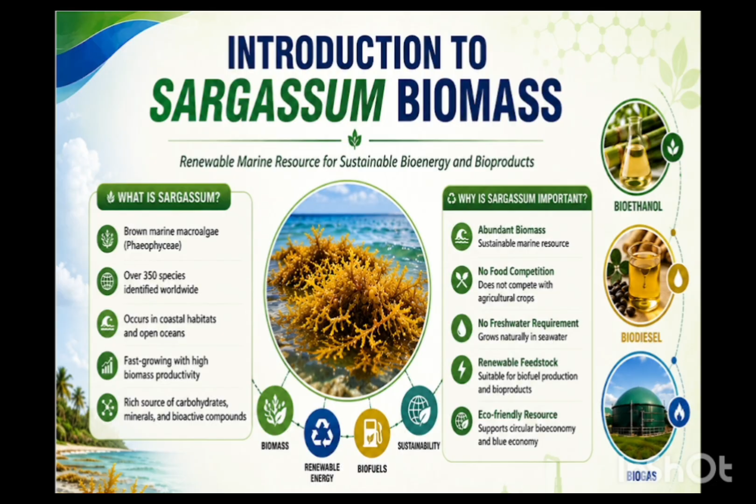It is suitable for biofuel production and bioproducts. It is an eco-friendly resource that supports the circular bioeconomy and the blue economy. So sargassum has both types of importance, as an eco-friendly and a renewable source.

Global distribution and availability of sargassum. Sargassum is basically found in the Pacific Ocean, Sargasso Sea, Indian Ocean, and the Great Atlantic Sargassum Belt, called GASB. It is found all over the world where there are coastlines, widely distributed in tropical and subtropical oceans. It is common in coastal waters, coral reefs, and pelagic environments, and exists in both attached and free floating forms. They form extensive floating mats across the ocean currents.

Availability: annual blooms generate millions of tons of biomass. Massive accumulations are reported in the Caribbean Sea, Gulf of Mexico, West African coast and Central Atlantic Ocean. The Great Atlantic Sargassum Belt is the largest floating bloom system, extending from West Africa to the Caribbean, thousands of kilometers in length. It provides a continuous and abundant feedstock for bioenergy and biorefinery.

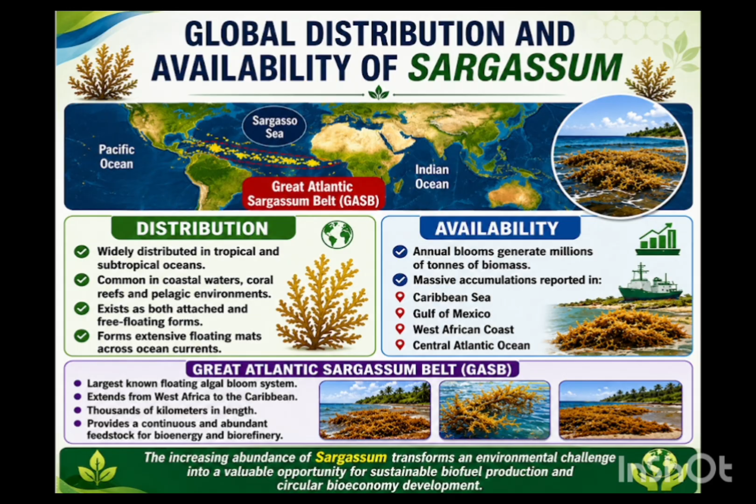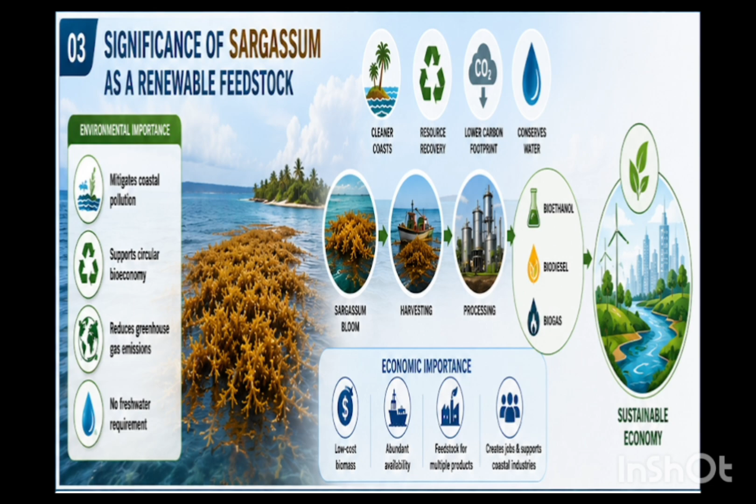So it is distributed all over the world, and its biomass production is higher compared to other feedstocks. What is the significance of using sargassum as a renewable source? First, environmental importance: it mitigates coastal pollution, supports the circular bioeconomy, reduces greenhouse gas emissions, and needs no fresh water. It also gives cleaner coasts, resource recovery, lower carbon footprints, and conserves water. Sargassum blooms are harvested and processed, and then biofuel production can be done. So it is one way to a sustainable economy.

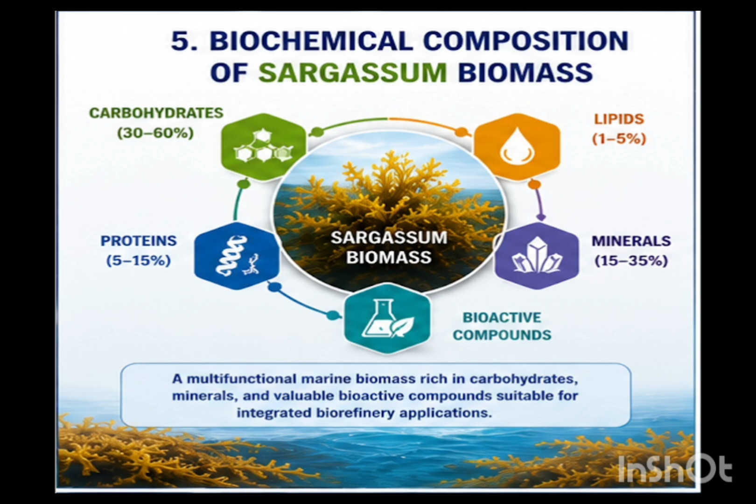So having the multifunctional biomass, rich carbohydrates, minerals, and valuable biocompounds, suitable for integrated biorefinery applications. So one by one, carbohydrates we call the phycocolloids. Major bioethanol feedstock is prepared from the phycocolloids of the carbohydrate like alginate, fucoidans, laminarin, mannitols.

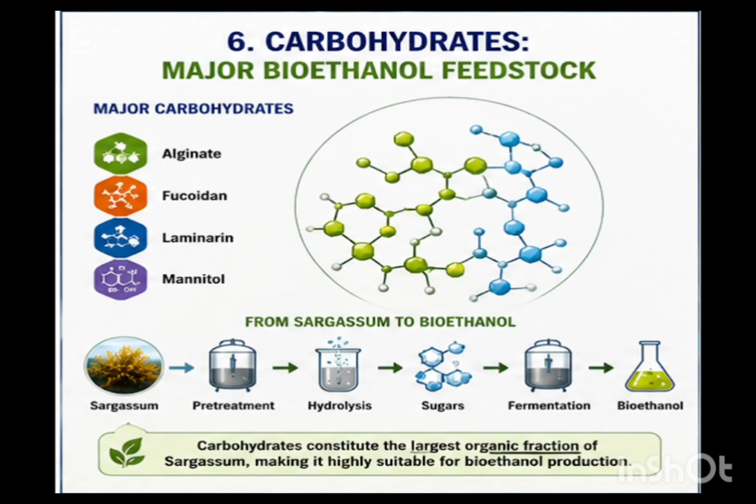These are some carbohydrate derivatives useful for the production of bioethanol, like sargassum harvesting, then the pre-treatment, hydrolysis, its conversion into sugar, then fermentation, and lastly it prepares the bioethanol. So it is easy to go from carbohydrate to bioethanol feedstocks.

Then the lipids are useful for biodiesel production, like the major derivatives of lipid like fatty acids, triglycerides, and phospholipids, that are useful for biodiesel production, like sargassum collection, lipid extraction, transesterification, and then it's converted into bioethanol or biodiesel. So it is one of the easiest ways of biodiesel production.

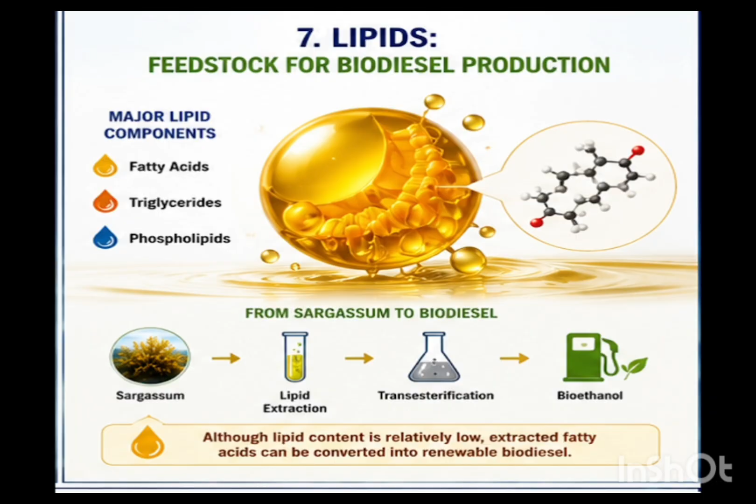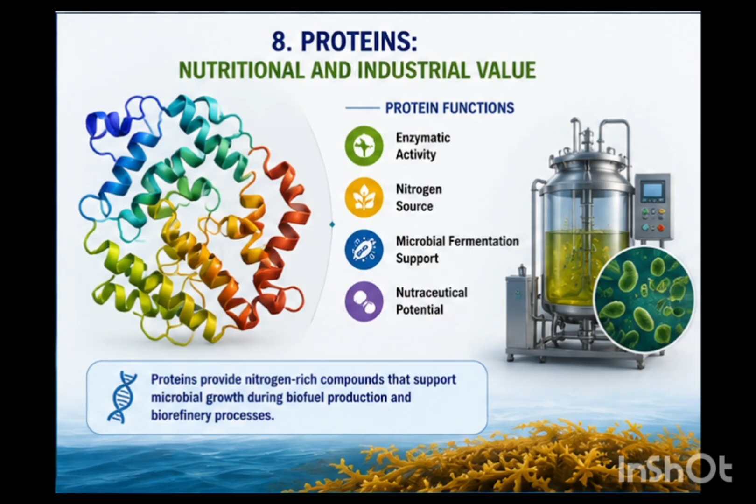Then the protein has nutritional as well as industrial value, like protein functions we call enzymatic activity, nitrogen source, microbial fermentation, and the nutraceutical potential. So it can be useful for different types of biomass.

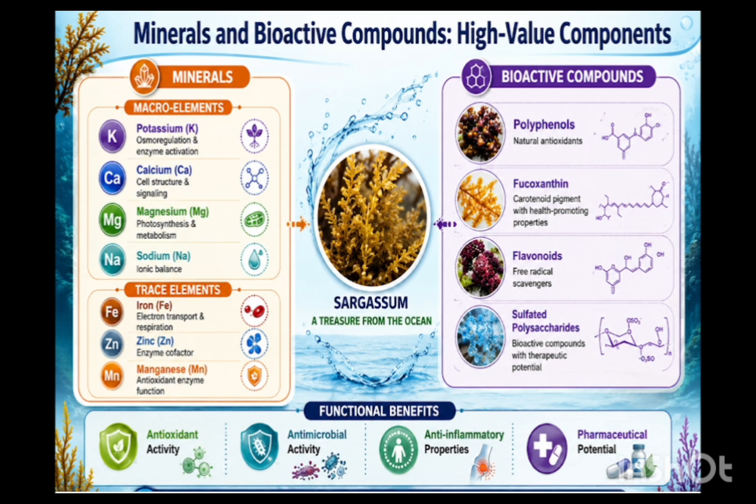Some bioactive compounds are also there like polyphenols, fucoxanthin, flavonoids, sulfated polysaccharides, that have their own functions like natural antioxidant, health promoting properties, free radical scavenging, bioactive compounds with potential. So those are some functions. So sargassum is one of the superior marine feedstocks for biofuel production. Advantages over the terrestrial biomass.

As earlier we have seen, terrestrial biomass needs land, fresh water, competes with food crops, has a lignin rich structure, and fertilizer and pesticide dependencies. By comparison, there is no land requirement, no fresh water requirement, no competition with food crops, rapid biomass growth, low lignin content, easy conversion into bioethanol, biodiesel, and biogas. It utilizes the coastal biomass blooms.

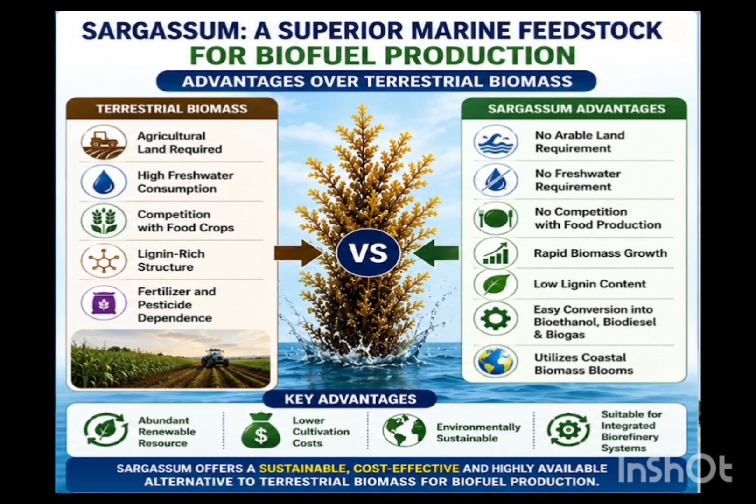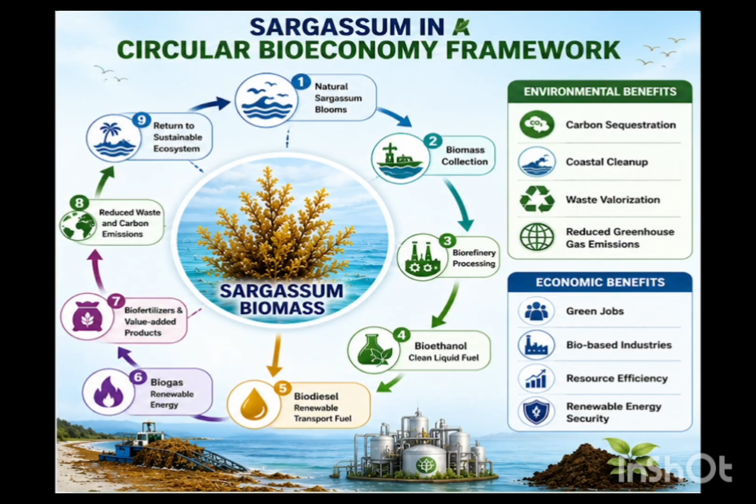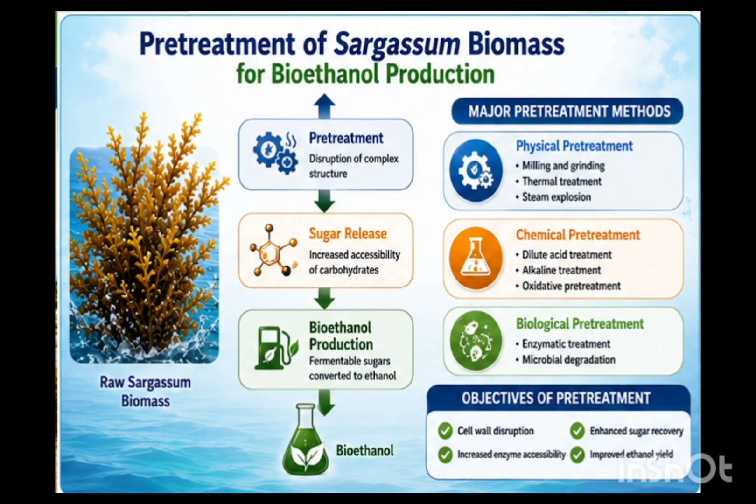Then the chemical pre-treatments are there: dilute acid treatment, alkaline treatment, oxidative pre-treatment, enzymatic treatment, and microbial degradation. So in this way we can pre-treat for the production of sugar, and then bioethanol production is possible. So in this way we can see that bioethanol production can proceed with the help of sargassum.

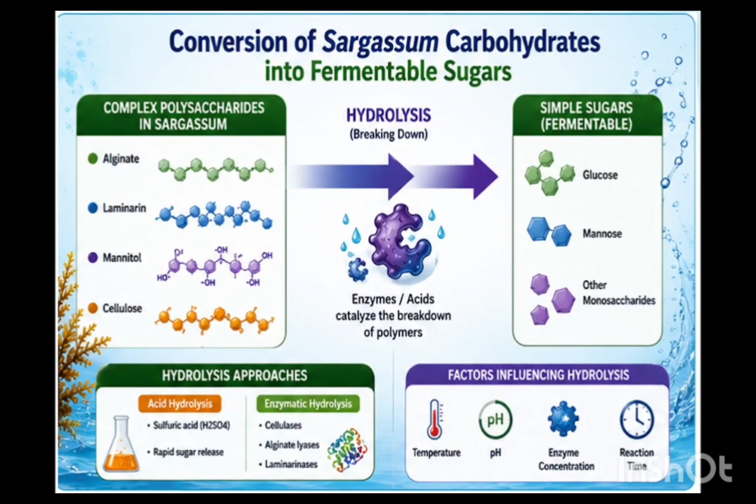Then after the sugar synthesis or sugar extraction, we go to hydrolysis, or the fermentation of sugars. Complex polysaccharides like alginate, laminarin, mannitol, and cellulose undergo the hydrolysis process, broken down by enzymes or acid-catalyzed breakdown into glucose, mannose, and other monosaccharides. That process we call hydrolysis, which is useful for the conversion of complex polysaccharides into monosaccharide compounds. So it is useful for the production of biofuels.

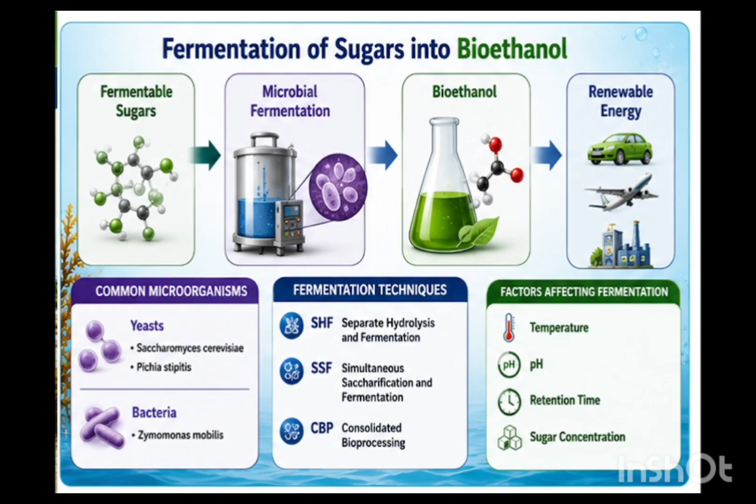Fermentation of sugar into bioethanol: fermentable sugar undergoes microbial fermentation into bioethanol, giving a renewable energy resource. A common organism used for the fermentation is yeast, or bacteria like Zymomonas. Fermentation techniques like separate hydrolysis and fermentation, simultaneous saccharification and fermentation, and consolidated bioprocessing are useful. During that process, we have to take care of temperature, pH, retention time, and sugar concentration. All these things are considered in the fermentation of sugar to bioethanol.

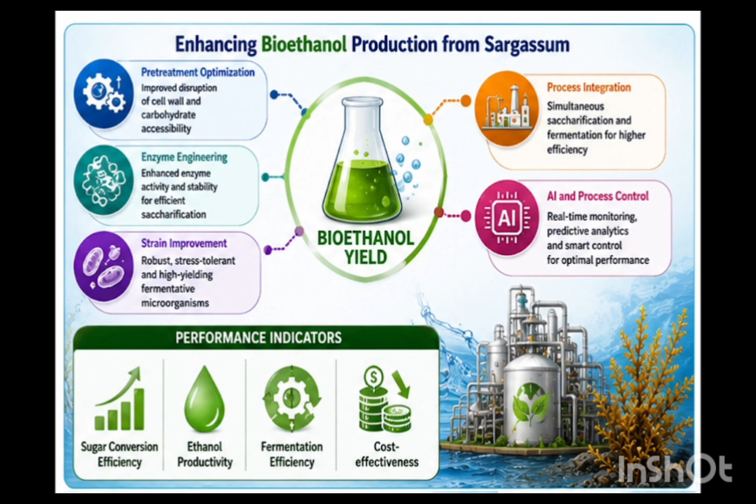And then process integration, simultaneous saccharification and fermentation for higher efficiency. Then artificial intelligence and process control: real-time monitoring, predictive analytics, and smart control for optimal performance. So in this way we can enhance the bioethanol production from sargassum.

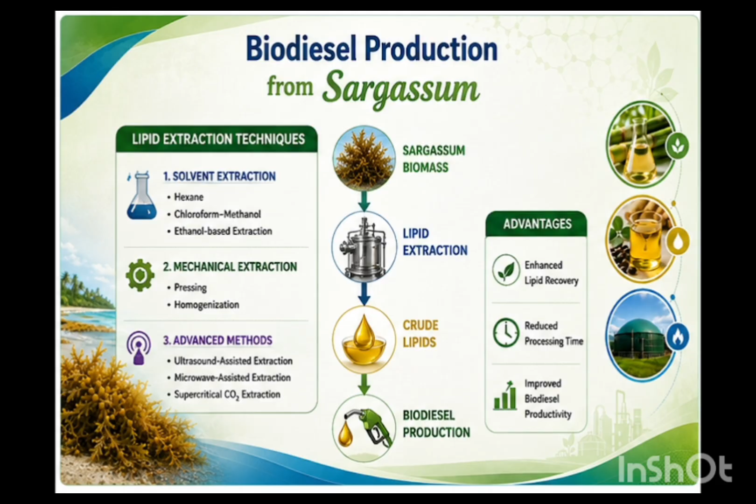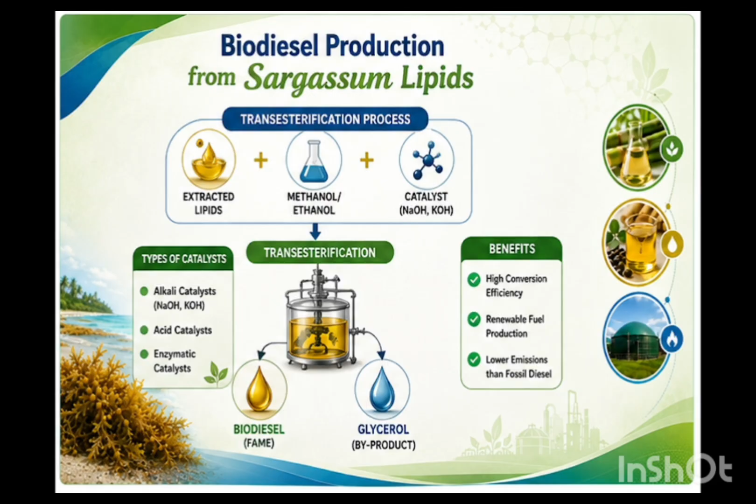So biodiesel production is simple: the extracted lipid is put into methanol or ethanol, a catalyst like NaOH or KOH is added, and then transesterification is done. During transesterification, two different products are formed: the commercial product we call biodiesel, and a non-commercial product, glycerol. The types of catalyst used are alkali catalysts like NaOH and KOH, acid catalysts, and enzymatic catalysts. So that is biodiesel production from sargassum lipids.

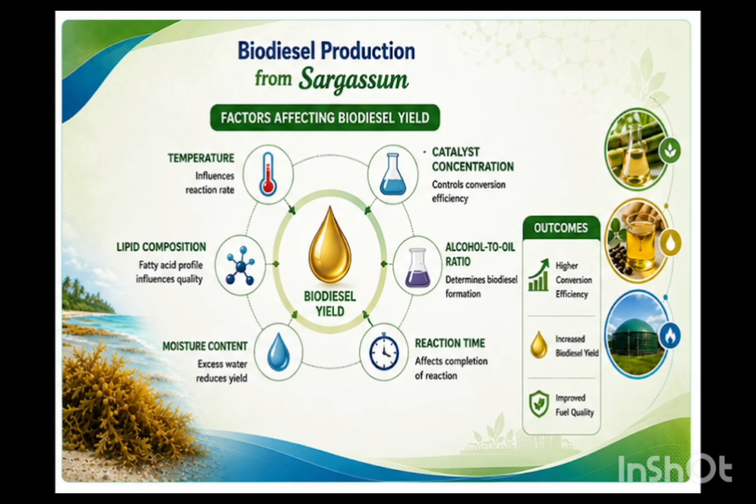Then for biodiesel production from sargassum, some factors are responsible, like temperature, lipid composition, moisture, reaction time, alcohol to oil ratio, and catalyst concentration. All these factors are responsible during the conversion of lipid into biodiesel.

Then biogas production from sargassum. There is one specialized process called anaerobic digestion, through which sargassum is converted into biogas. Sargassum biomass collection is done. Then pre-treatment: size reduction and thermal and chemical treatments. Then anaerobic digestion, in which biogas is produced, like CH4 and CO2. Then after biogas production, the digestate can be used as a biofertilizer, because it has high nutrient value.

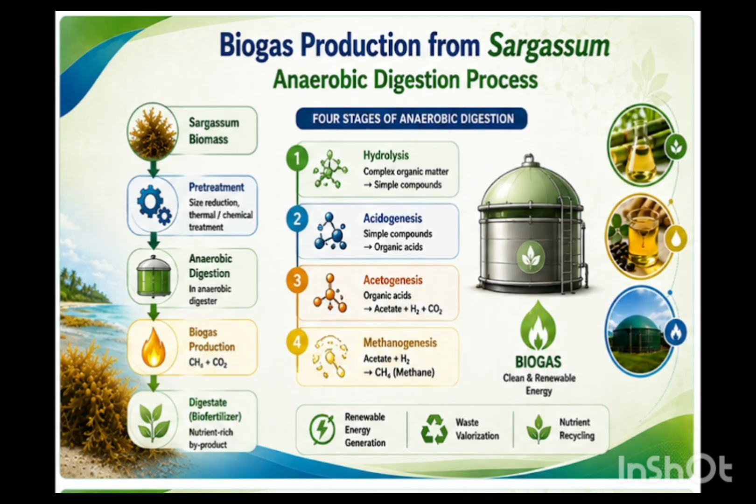During that process, some other processes also take place, like hydrolysis, acidogenesis, acetogenesis, and methanogenesis. Hydrolysis converts complex organic matter into simple compounds. Acidogenesis converts simple compounds into organic acids, and the organic acid to acetate we call acetogenesis, and the acetate into methane. So these processes take place during anaerobic digestion. So it is in this way we can produce biogas from the sargassum biomass.

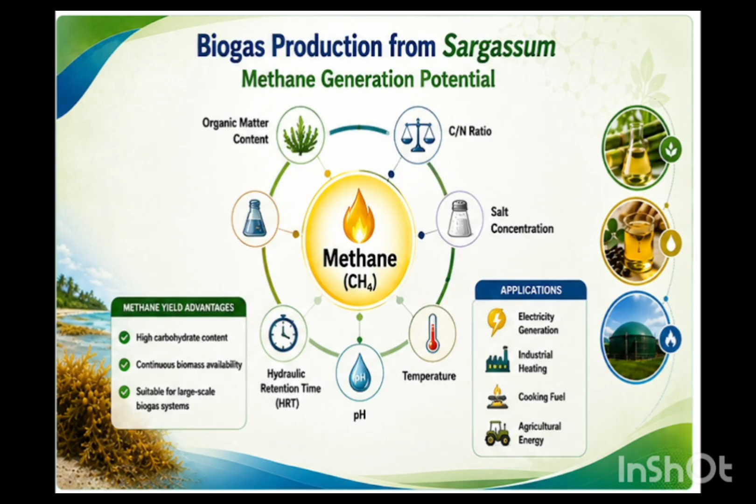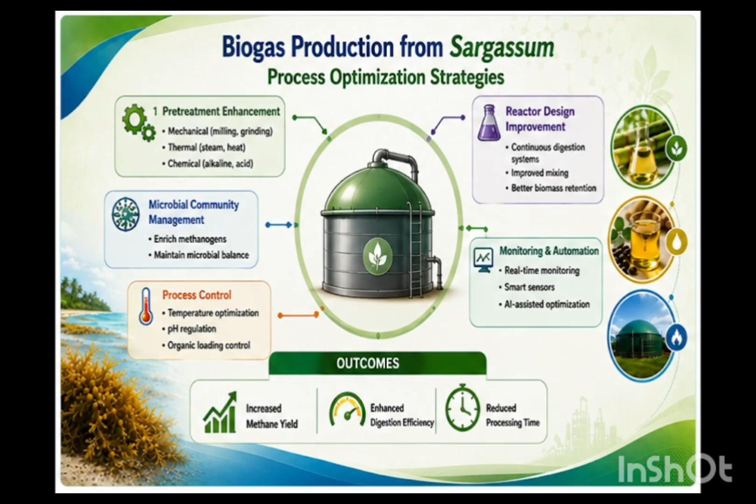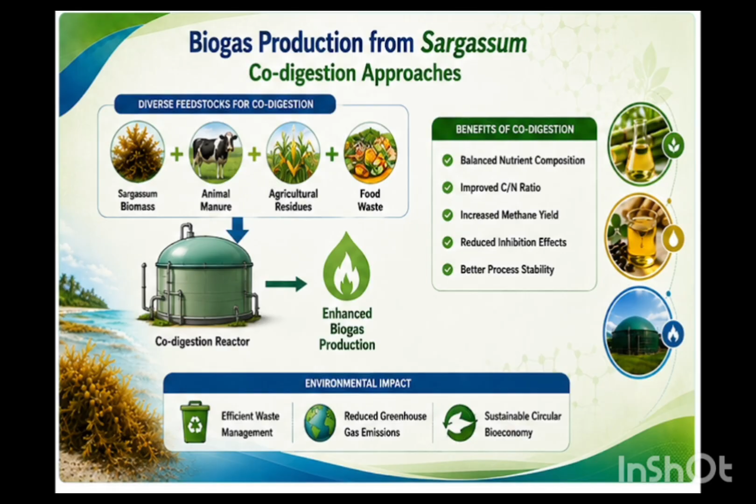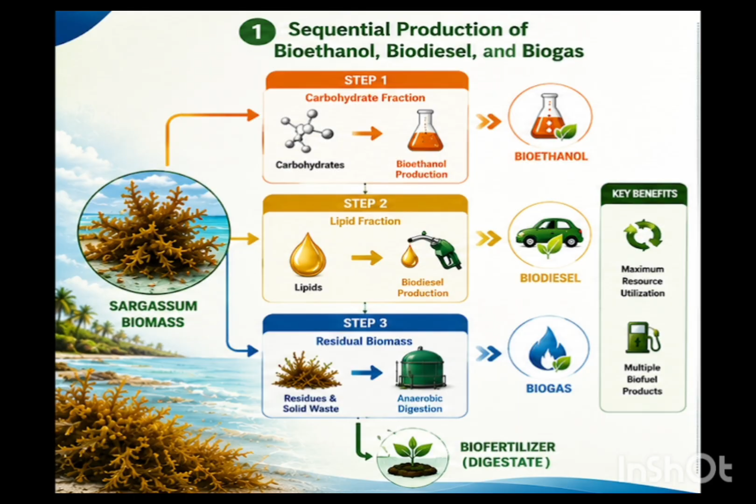Then the sequential production of biogas, bioethanol, and biodiesel: from sargassum we can sequentially produce bioethanol, biodiesel, and biogas, as the carbohydrate, lipid, and residual solid waste will be converted into bioethanol, biodiesel, and, by anaerobic digestion, biogas. And the last product we can use as a biofertilizer. So it can be useful for the production by these techniques.

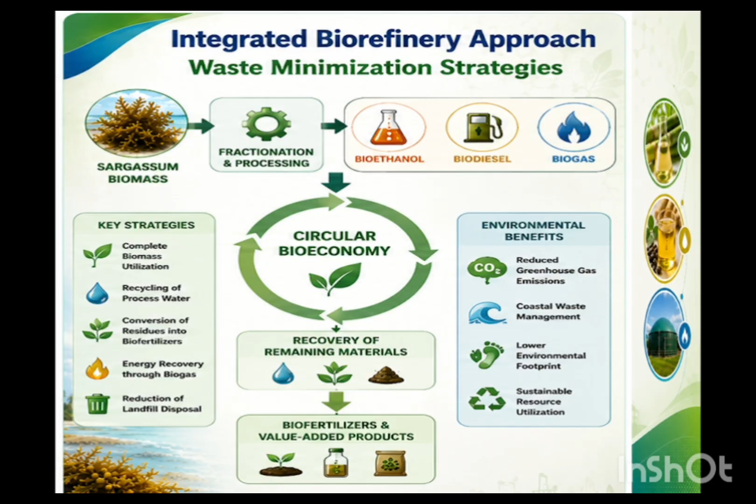Integrated biorefinery waste minimization strategy: the sargassum biomass undergoes fractionation and processing into bioethanol, biodiesel, and biogas. Then the circular bioeconomy, recovery of remaining materials, and biofertilizer and value-added products can be synthesized. So it is an integrated biorefinery industry. We can see the environmental and economic perspective.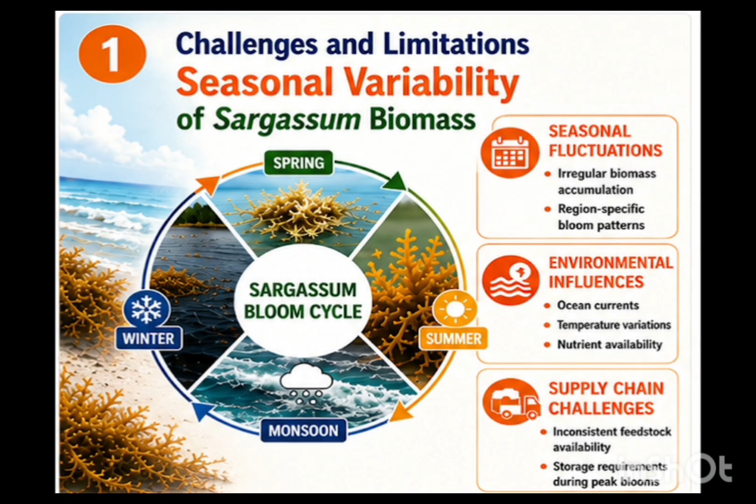Then some challenges during cultivation or production of biofuels, like seasonal variation of sargassum biomass. There are the spring, winter, summer, and monsoon seasons. During the monsoon season we get a very low amount of biomass, but in the remaining three seasons we get a proper amount of biomass. Seasonal fluctuation, environmental influence, and supply chain challenges: such challenges we have to face during the production of biofuels.

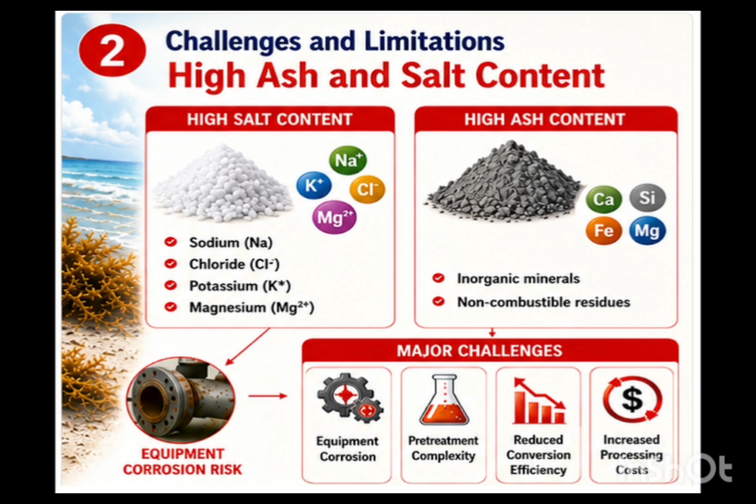Then another challenge is high ash and salt content. When we are harvesting sargassum, during the extraction we get other components like high salt content as well as high ash content. So it will be difficult for the production of biofuel. Then we face other problems like equipment corrosion risk, pre-treatment complexity, reduced conversion, and increased processing cost. These are the challenges we have to face.

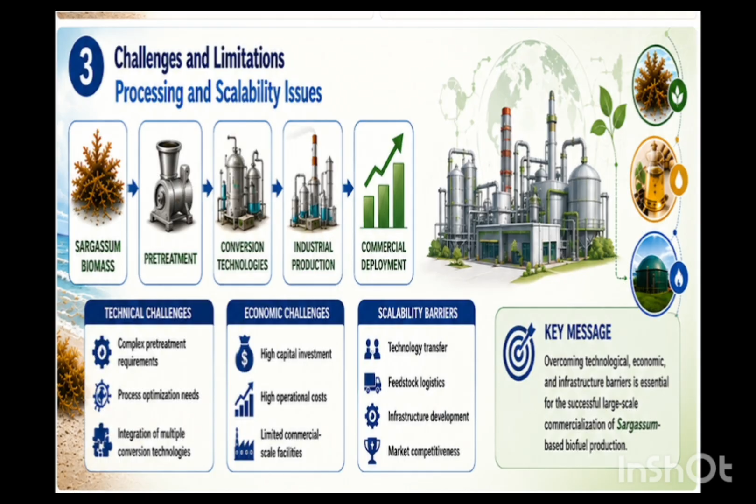Then another challenge is the processing and scalability issue: sargassum biomass pre-treatment, conversion technology, industrial production, and commercial deployment. So these are the challenges we can face during processing and scalability.

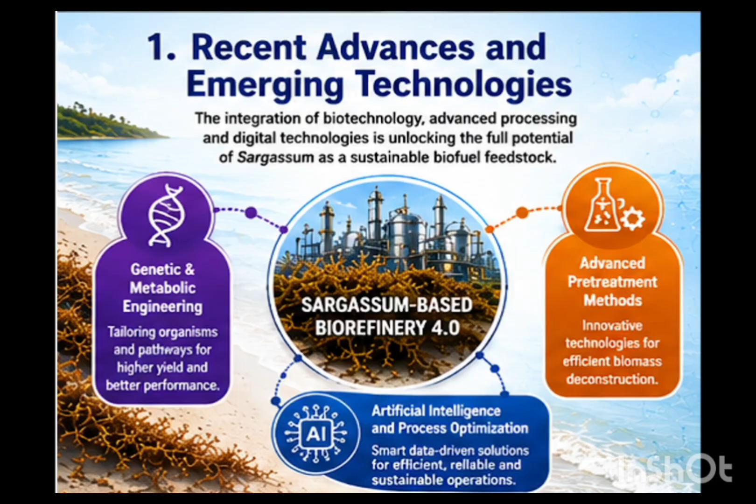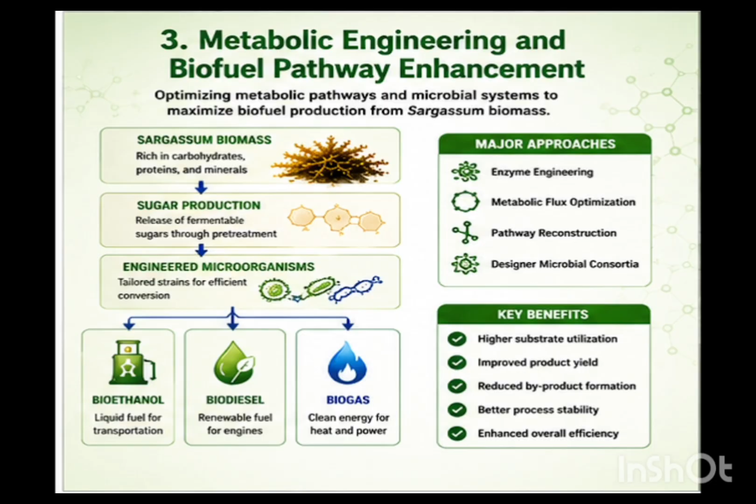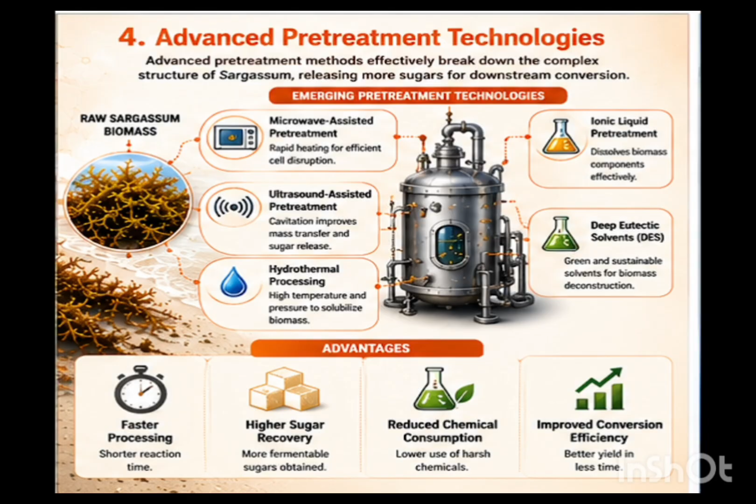Then metabolic engineering is useful for the biofuel pathway, like sargassum biomass, then sargassum sugar production, and engineered microorganisms. So it is helpful for increasing biofuel production within a short time. Then advanced pre-treatment technology is also used for the easy production of biofuels, like microwave-assisted pretreatment, ultrasound-assisted pretreatment, hydrothermal processing, ionic liquid pretreatment, and deep eutectic solvents. So such advanced techniques are there for the production of biofuels.

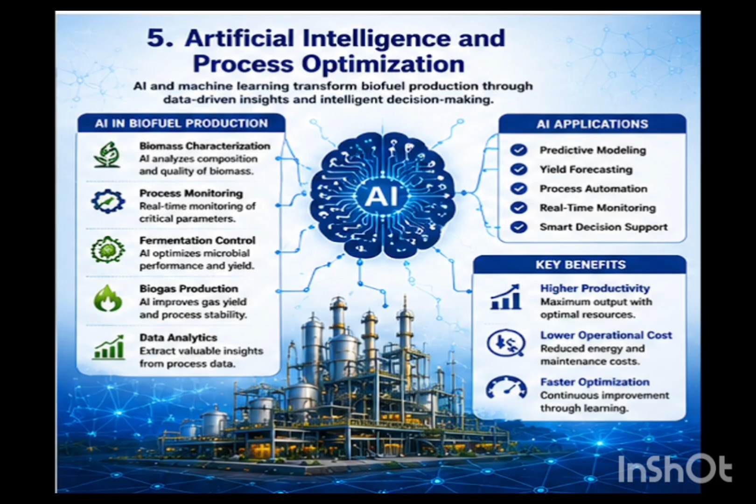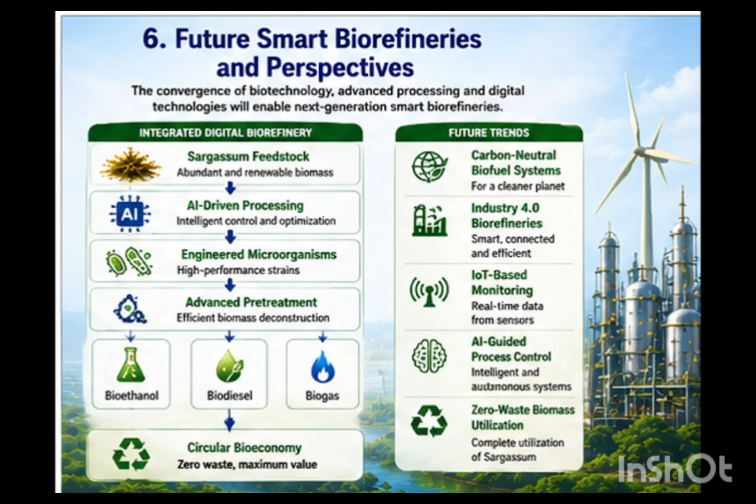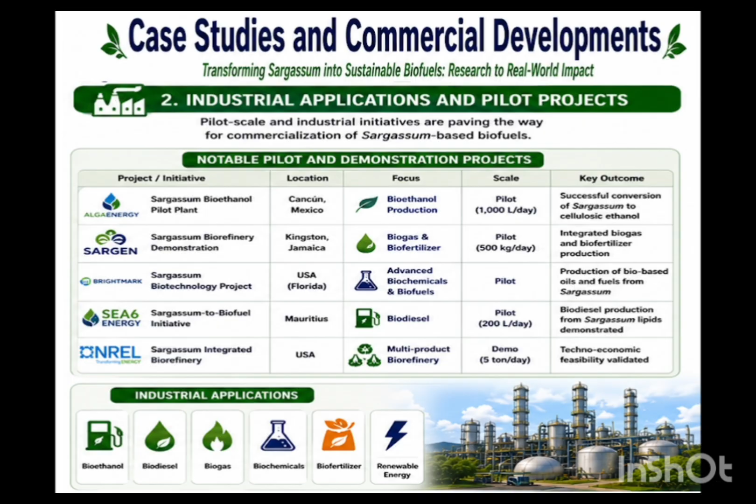Some commercial developments. Then industrial applications like Alga Energy, SARGEN, Brightmark, SEA6 Energy, and others, with bioethanol production, biogas, fertilizers, advanced biochemicals, biodiesel, and multi-product systems working in different locations. So there is industrial interest, and some pilot projects are running.

The conclusion of our presentation: sargassum biomass is a promising renewable feedstock for producing bioethanol, biodiesel, and biogas, offering an environmentally friendly alternative to fossil fuels. Valorization of sargassum transforms a coastal waste problem into valuable energy resources, reducing pollution while creating economic opportunity. Advances in biorefinery technology, supportive policy, and strategic investment can accelerate commercialization and improve economic viability.

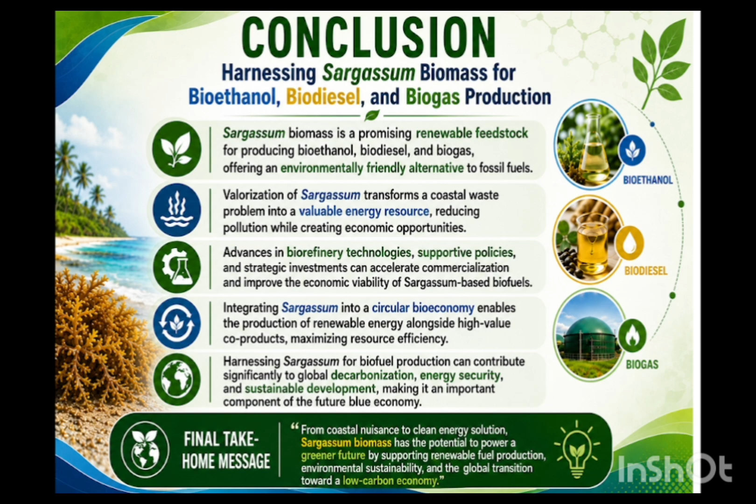Sargassum-based biofuel, integrating sargassum in a circular bioeconomy, produces renewable energy alongside high-value co-products, maximizing resource efficiency. Harnessing sargassum for biofuel production contributes significantly to global decarbonization, energy security, and sustainable development, making it an important component of the future blue economy.